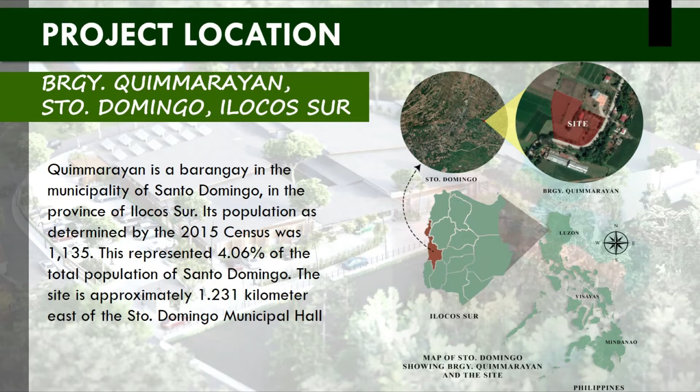Project location. The site is located at Barangay Quimmarayan, Santo Domingo, Ilocos Sur. The site is approximately 1.231 km, with a total lot area of 8,099.3446 square meters. The site has an irregular polygonal shape and is accessible to all vehicles like van, truck, motorcycle, car, bus, and bicycle.

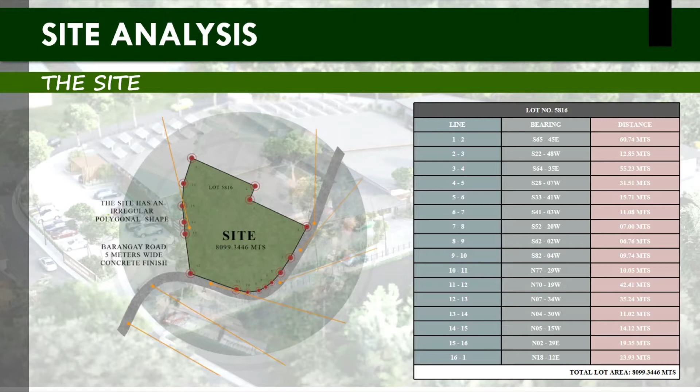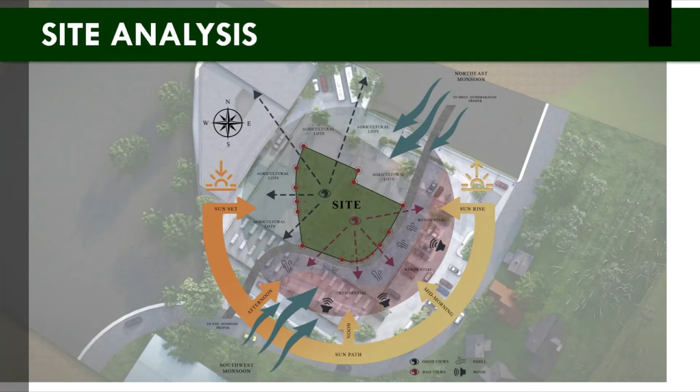SWOT analysis. Strengths: good panoramic view of the farmlands, plentiful fresh cool breeze produced by the northeastern and southwestern monsoon, accessible to all local vehicles, and the site has its own water source.

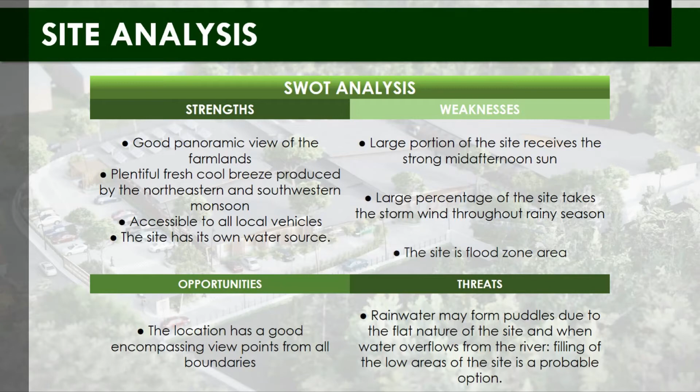Weaknesses: a large portion of the site receives strong mid-afternoon sun, a large percentage of the site takes storm wind throughout the rainy season, and the site is a flood zone area. Opportunities: the location has good encompassing viewpoints from all boundaries. Threats: rainwater may form puddles due to the flat nature of the site, and when water overflows from the river, filling of the low areas of the site is a probable option.

Site development plan. The main building is oriented to the northeastern part of the site, and the mushroom growing building is oriented to the eastern part facing the main building. The main entrance of the project is located at the eastern part, and the emergency exit is located at the southwestern part of the site. There are 29 parking spaces, 2 bus parking spaces, and 10 motorcycle spaces.

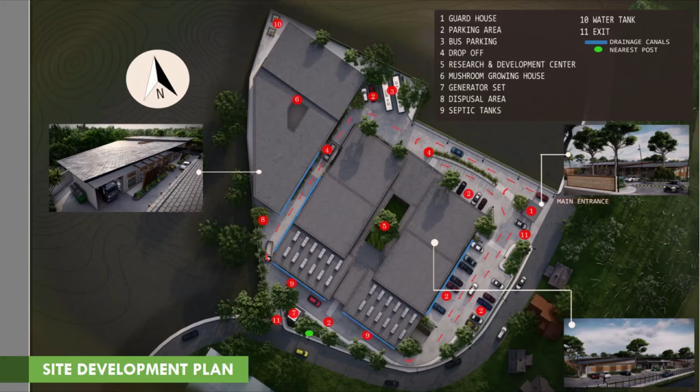Design philosophy: Simplicity is the ultimate sophistication, by Leonardo da Vinci.

Evolution of form. My form took place by considering the local climate. I came up with a bahay kubo form as the exterior look of my building, considering its characteristics and adding a more efficient and modern look of bioclimatic architecture.

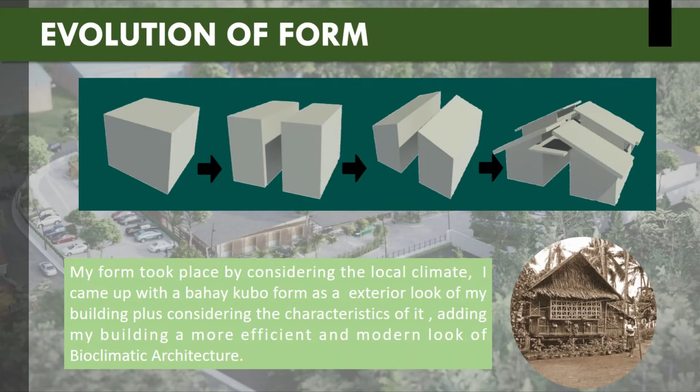Design considerations: environmental responsiveness, energy efficiency, food security, resiliency, and bioclimatic architecture.

Innovative approach: bioclimatic design. Bioclimatic architecture is a type of architecture where balance and harmony are constant with the environment. Thermal comfort is sought by taking into account the climate and environmental conditions.

Passive solar. The reduction of energy consumption in buildings can be achieved by simple methods and techniques, using appropriate building design and energy-efficient systems and technologies such as passive solar systems.

Green solution: design with nature in order to minimize the negative environmental impact of buildings.

Energy efficient. Better insulation, more efficient windows, doors, and skylights, as well as high-efficiency air conditioning, can also contribute to a more efficient building, minimizing energy-consuming appliances and machines.

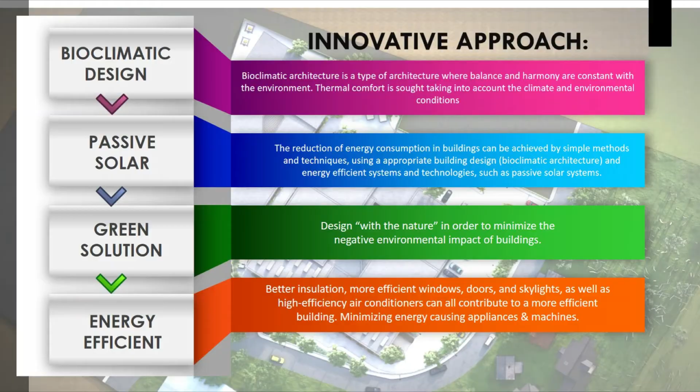Bioclimatic architecture refers to the design of buildings and spaces based on local climate, aimed at providing thermal and visual comfort, making use of solar energy and other environmental sources. Basic elements of bioclimatic design are passive solar systems which are incorporated onto buildings and utilize environmental sources for heating, cooling, and lighting the buildings.

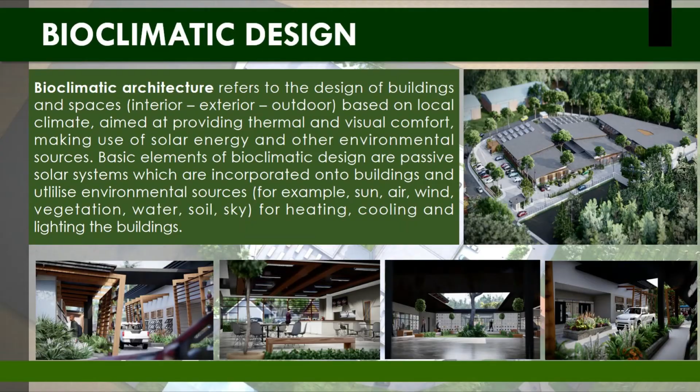Innovation applied: solar panels, breeze blocks, sun shadings, and louvers.

Architectural drawings and perspectives. Research and Development Center floor plan, divided into 5 departments: the Administration Department, Lecture Room, Library, Mushroom Product Processing Area, and Mycology Laboratory. It has a 2,500 square meter building area.

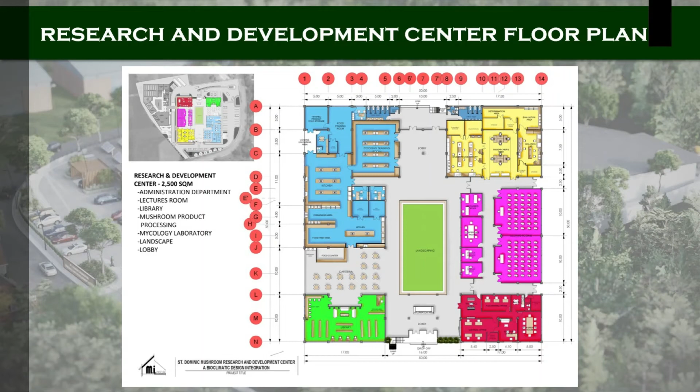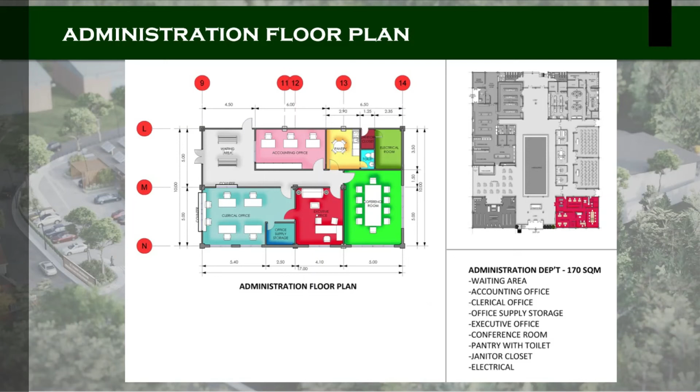Administration floor plan. The Administration Department has a waiting area, accounting office, clerical office, office supply storage, executive office, conference room, pantry with toilet, janitor closet, and electrical room, with a 170 square meter floor area.

Lecture room floor plan has 2 lecture rooms, lecturer's office, conference room, mushroom production department office, and food production department office, with a 281 square meter floor area.

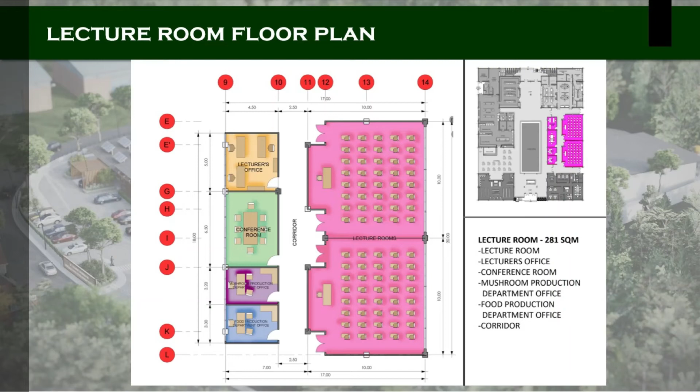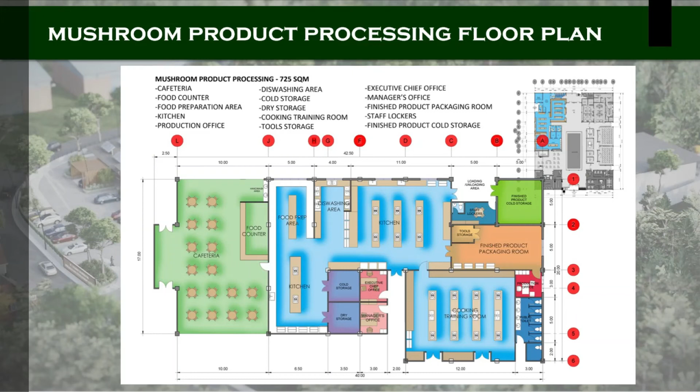Mushroom product processing floor plan has a cafeteria, food counter, food prep area, kitchen, production office, dishwashing area, cold and dry storage, cooking training room, tool storage, executive chef office, manager's office, finished product packaging room, finished product cold storage, and staff lockers, with a 725 square meter floor area.

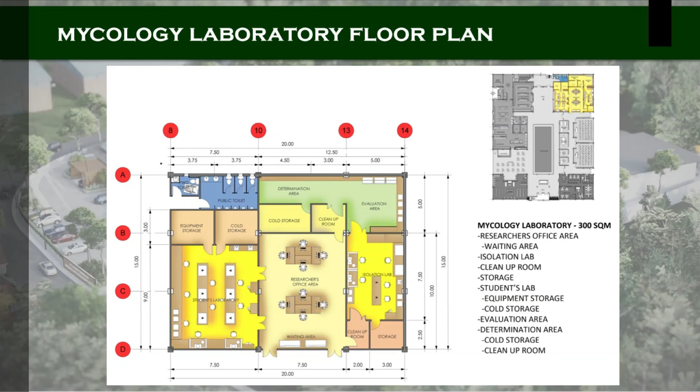Mycology laboratory floor plan has a researcher's office area, waiting area, clean up room, isolation lab, evaluation area, determination area, students laboratory, cold storage, and equipment storage, with a 300 square meter floor area.

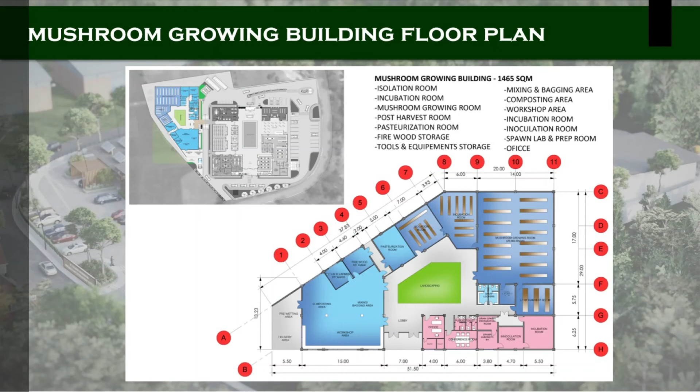Mushroom growing building floor plan has a total floor area of 1,465 square meters.